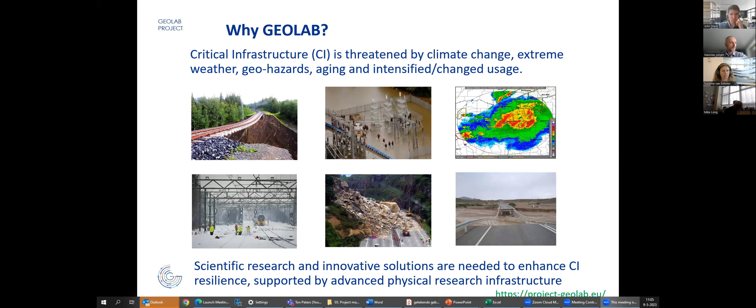And we want to develop our knowledge and develop solutions. So there are a number of examples of knowledge development. So develop knowledge on the impact of climate change, extreme weather, and geohazards, the aging mechanisms of soil and structures, the integral behavior of a critical infrastructure system. These are all knowledge developments, and we are also looking at technology solutions. So like the application of new construction materials, implementation of new building methodologies, new design approaches using data and numerical modeling.

So Geolab is a collaboration of 10 partners who all have a certain type of research infrastructure. And we are talking about geotechnical environmental research facilities. And within our consortium, we have 5 centrifuges. We have the Deltares centrifuge, the University of Gustave Eiffel, TU Delft, Cambridge, and ETH. These are all different types of centrifuges that are complementary to each other.

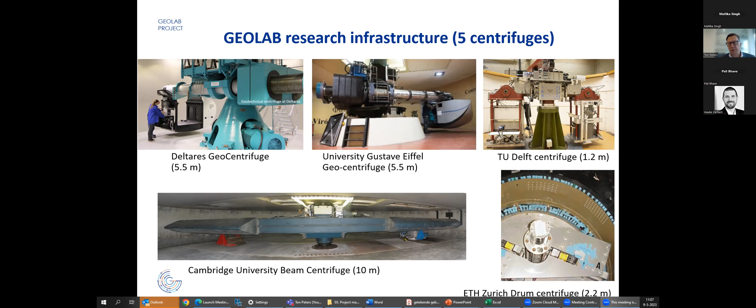But we also have other types of research infrastructure in Geolab. So we have, for example, the geomodel container at Deltares, but also the CEDEX railway track simulator, where you can simulate a whole railway track on 1:1 scale, including also the subsoil and the subgrade of the railway track. We have at TU Darmstadt a geotechnical test pit with large dimensions, 5 meters wide, up to 3 to 6 meters deep, where you can build a model.

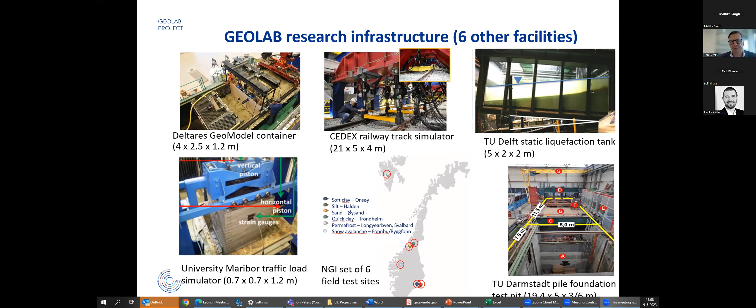At the University of Maribor, we have a small scale traffic load simulator. And in Norway, we have a number of geotechnical test sites. And what you can see is that we are able within Geolab to do tests at a small scale up to field scale.

So what are we doing in the project? We started the project approximately 2 years ago, and these are the activities that we have in the project. First of all, we have the joint research activities where we develop all kinds of deliverables, for example, guidance of transnational access, but also innovation and data management. One of the goals of Geolab is also to share the results of experiments to the wider community, so that the result of an experiment, the data set, is well stored and is also reusable.

The other activity is networking activity. So we're building a virtual community. We have already a big LinkedIn group. We're still working towards reaching out to other new users, and also having a special innovation management part where we try to connect to the industry to build solutions. What's also a nice thing about Geolab is that we have a focus on next generation researchers. So we try to involve them in experimental work in the form of training programs and internships.

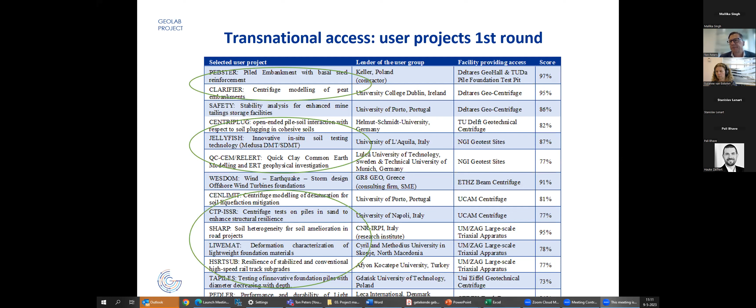These are the results from the second round of transnational access. So these are projects that are ongoing, will be performed this year. We had 26 proposals during the last round of transnational access, of which 11 were awarded access.

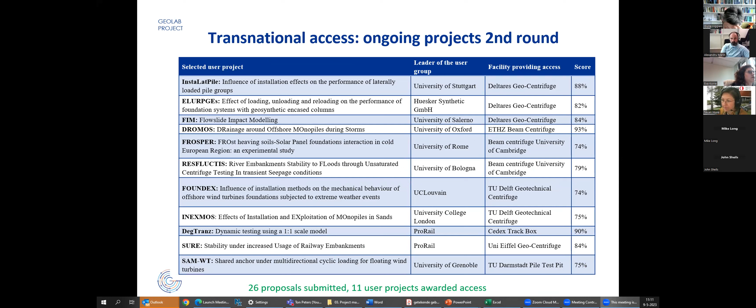So talking about the transnational access call that's now ongoing, the third one, we have selected the theme experiments to validate advances in numerical modeling and data science, leading to a better engineering design. So we are inviting you to bring proposals to the table that fit with this theme of the call. This is funded from the project, as I said, and the submission deadline is on September 30.

So there's still time, but yeah, we say if you have an idea, get in contact with the facility manager, the facility you would like to use, and discuss with them your idea in an early stage in order to see if it's feasible to do the experiment that you are thinking of, and to get guidance on how to develop your proposal. So it's an open invitation to do that.

There are also some restrictions in transnational access. First of all, the user group should be for the majority from the EU 27, plus the associated countries. So international collaboration is possible, but only at a limited scale. And the user group should be from another country than where the facility is. So for the Netherlands, for example, for our facility here, we need to have proposals coming from outside the Netherlands.

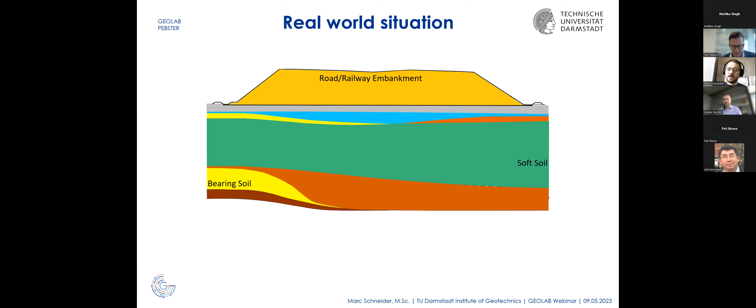First, I want to show you the real-life situation we are modeling. Here you can see a common soil with low bearing, typically softer soils toward the top, and the deeper you go, you will eventually reach bearing soils. If you were to construct an embankment on this type of soil, you would see large and uneven deformations and settlements. To improve the situation, we can make this embankment a piled embankment. The piles are used to transfer the mostly vertical loads to the lower lying bearing soils. Additionally, you can use basal reinforcements to reduce horizontal stresses, which would cause horizontal deformations or horizontal forces on the piles.

To create our model tests, we took a part of this embankment. We altered an already existing test setup at Deltares and performed a series of small scale tests. You see the human for scale, and this figure of the large scale test is also in scale to the other. The focus of our research was the influence of the steel reinforcement, which is the biggest change.

It has a higher bending and tensile stiffness compared to, for example, geogrid geosynthetic reinforcements. Also, these piles are usually assumed to be supported rigidly, and we made a flexible support to see the influence of that. And of course, the whole operation was to see if it can actually be scaled down, and what you have to watch out for.

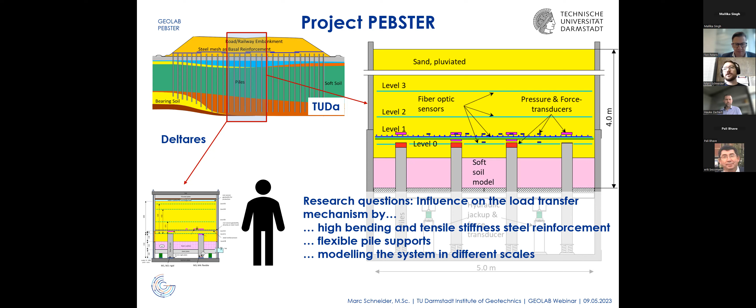At the top left, you already saw in the photos this is the geotechnical test pit here at TU Darmstadt. Of this large pit, we took this small piece that you can see in the photo. The 3 meters depth were enlarged with a formwork placed on these outer walls, to allow a total setup height of 4.0 meters to fit all this in.

In the test setup, just as in the embankment, you have a soft soil below, and the piles are founded more rigidly on a more bearing soil. We have the basal reinforcement in blue, the embankment body itself made up of sand, and of course a lot of measuring instruments.

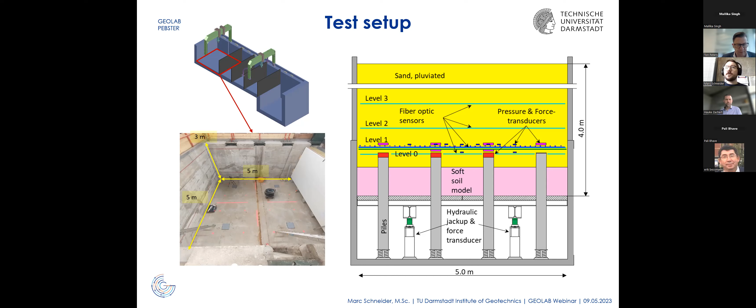I will show a small animation that shows the installation procedure, which is at the same time also the test procedure itself. As in the picture before, you see the soft soil having settlements while the embankment is constructed, the grid deforming, and we also watch the surface deformation while we perform the tests.

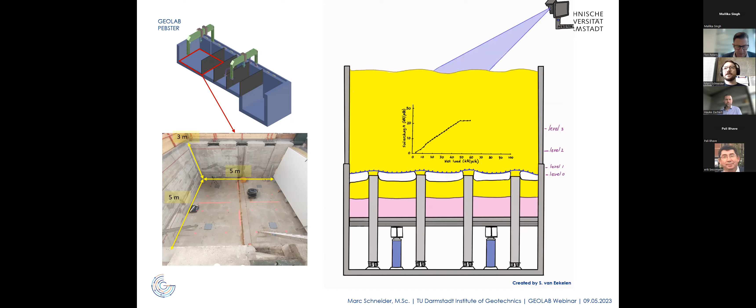Now I want to talk about the elements of our test setup, starting with the piles. Here in the center photo, you can see the base of the test setup, and the piles sticking out by about 1 meter. At the pile top, we have roughened the surface a bit to model in situ concrete. In total, including the space below this second floor, we have 2.5 meters of piles per pile.

This is the flexible base that I talked about - these are springs that allow small settlement for the forces acting. And why do we need this second floor? I will tell you now.

We constructed this setup with hydraulic jacks at the very bottom, then a series of steel beams on top of that. The finish was really thick, 10 centimeter thick wooden plates with holes for the piles that you see in the bottom right. And then a rubber granulate to model soft soil behavior.

This whole setup is part of the soft soil model, because the jacks that you see on the left are initially, before the test was performed, extended by 220 millimeters and can be lowered at the end of the test. So we reduce the subsoil support even more, creating even more settlement in the soil.

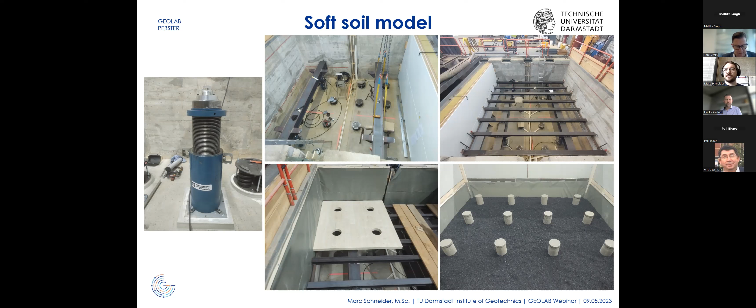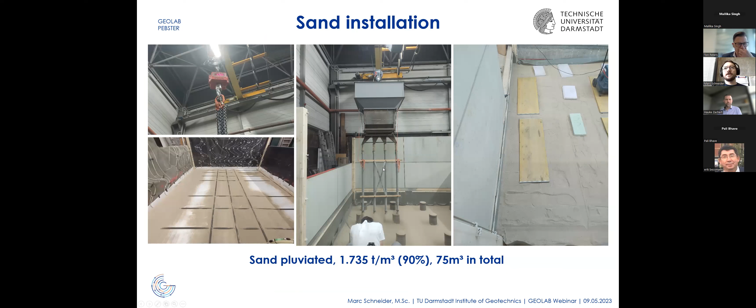The sand, so the embankment body itself, was pluviated with the pluviator that we have here at Darmstadt, which you see in the center image, and we achieved quite a high density. The main difference for this test is the steel reinforcement.

We have 3 parts of the steel reinforcement. In the left half, it's one continuous sheet. On the right, there's a bit of an overlap between those 2 sheets, and these 2 halves are just on contact with each other. They are connected by these hooks you see in the right image, and some of them even have strain measurement.

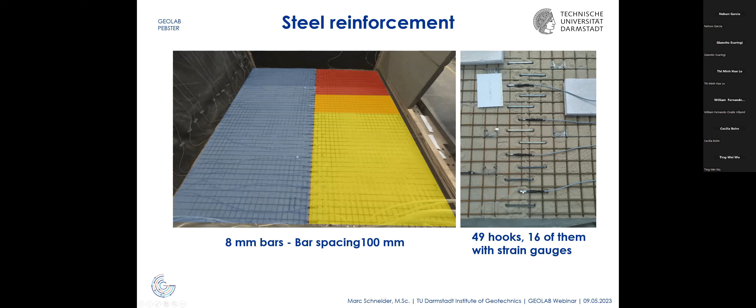More about the measuring instruments we used: these are the glass fiber instruments. In its simplest form, it can contain one single strand of glass fiber that enables us to measure the strain along the whole sensor. In this more advanced form, those black bars contain 4 strain measurements that you can derive deformation from.

Okay, that is my presentation about the PEBSTER test setup. Thank you very much.

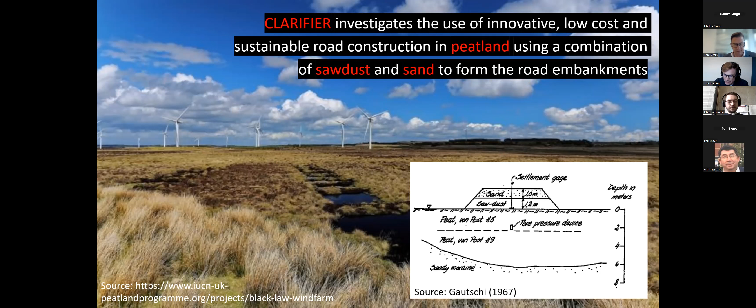Our project was inspired by 4 60-year-old embankments of sand and sawdust constructed on Norwegian peat. Although a range of data from the 60-year-old trial embankment exists, we are lacking detailed data on the failure mechanisms of such sand and sawdust constructions on natural fibrous peat, and we are lacking data on the performance of such embankments during traffic loading. These 2 items form the main research objectives of the Clarifier project.

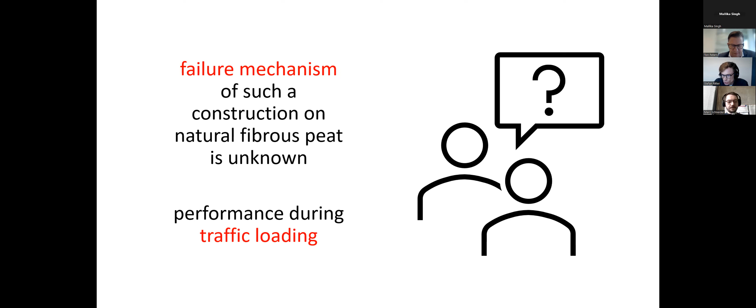To meet these objectives, we performed a series of centrifuge tests. First, we started with so-called three plate loading tests, where we were interested in how well we can model natural peat and how we can investigate the failure mechanism further. These models consisted of natural peat loaded vertically by a load plate, with a range of instruments including displacement sensors, pore pressure transducers, total pressure cells, and a CPT to investigate soil properties during flight.

Then we performed 4 embankment tests, consisting of sawdust and sand embankments at small scale above the peat. In this test, we investigated the behavior of sand and sawdust embankments during traffic loading. Then we were interested in how the peat variability, the natural inherent peat variability, affects the test results. And we performed one test where we looked at the role of a geotextile at the interface between the sawdust and the peat.

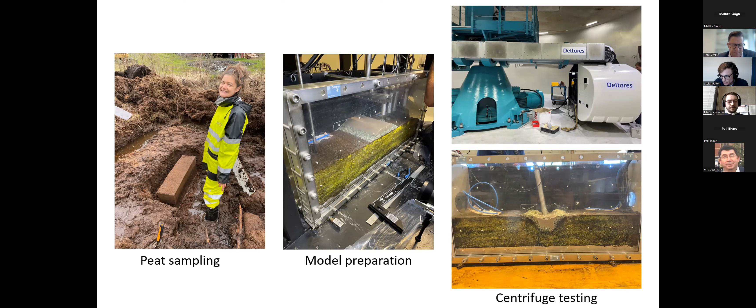We are now working on investigating the experimental data, using data from our sensors, but also conducting a range of digital image correlation. Then we couple our work with numerical modeling, as well as the field data obtained from the 60-year-old field trials, to get further insight into the behavior of these sand sawdust embankments on natural peat.

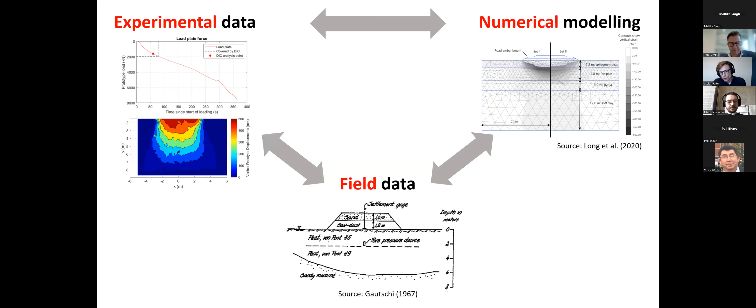If you're interested further in this research, we just published a preprint of our first paper on the behavior of the 60-year-old trial embankments on peat, which you can download already. In addition, Deltares produced a very nice video highlighting the work carried out in this Geolab Verifier project, which can also be found online.

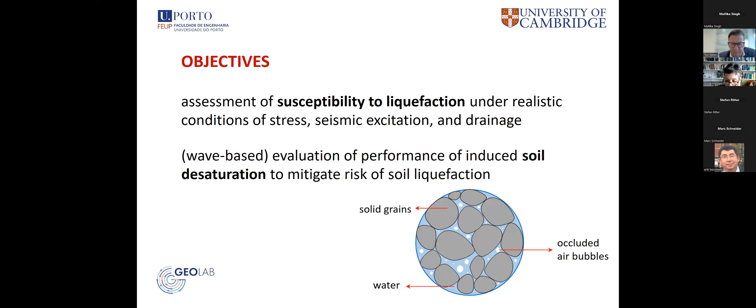Now, the team was essentially a Portuguese team. The leader was Cristiana Ferreira, who is a research associate professor at University of Porto, and she was assisted by two young researchers, one PhD student from Iran working in Portugal and one research associate from Colombia, and Professor Antonio Viana da Fonseca, who was the most senior member of the team. There was also one intern, Arianna Pucci, coming from Italy, joining the activities of the team during the project.

Now, this is a very experienced team on this topic. They have expertise both from the point of view of the interpretation of wave propagation methods, both P and S waves, and also the connections between wave velocity, degree of saturation, and risk of liquefaction.

We tested two models. They were both created in Hostun sand at a relative density of 40%, and one of them was fully saturated using methyl cellulose solution. This is not water - this is to render compatible, from the scaling point of view, the seismic times, the dynamic times, and the times of consolidation.

And the model was heavily instrumented. You can see that there were three layers of bender elements. These were propagating S waves and P waves in the direction orthogonal to the direction of shaking during the seismic events.

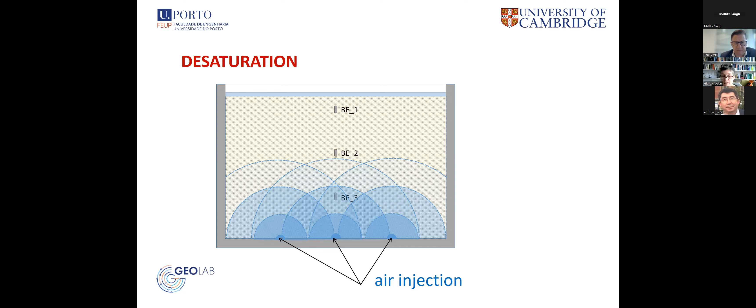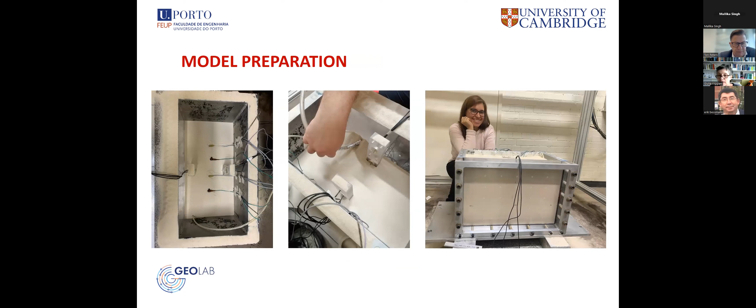And here you can see model preparation. So as the sand is pluviated, the instruments are placed, accelerometers and pore water pressure transducers at the different heights in which they are supposed to be. Here you can see the two columns of the frame that are supporting the bender elements. The top of the frame is only connected after the sand has been completely poured. This is more on instrument preparation, and this is a very happy Cristiana Ferreira once the first model was completely prepared. And here you can see the model once it's been placed on the shaking table.

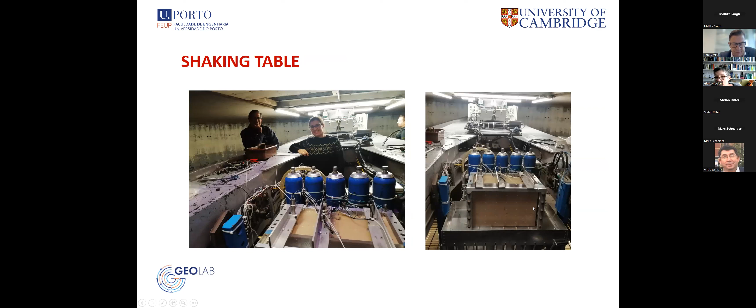So there is this servo hydraulic shaker that can simulate all sorts of dynamic histories. And also you can see here that there are 3 LVDTs that are measuring the surface settlements of the sample directly, besides the PIV, which is done through this Perspex window on the sample. Here is Fausto Molina, still in the centrifuge, but the model is absolutely ready to fly. This is a view from inside the Cambridge centrifuge.

And I just wanted to mention that together with the centrifuge testing, that were the main activities, there were a set of parallel activities which took place in the geotechnical laboratories of the Cambridge National Research Facility for Infrastructure Sensing, which included sand characterization. So the Hostun sand that was used in the test was fully characterized in terms of particle morphology using a QICPIC equipment that will look at the particles as they fall in front of a stroboscopic light, and there are pictures taken. So you can look at a number of morphological parameters, including sphericity, aspect ratio, and the likes.

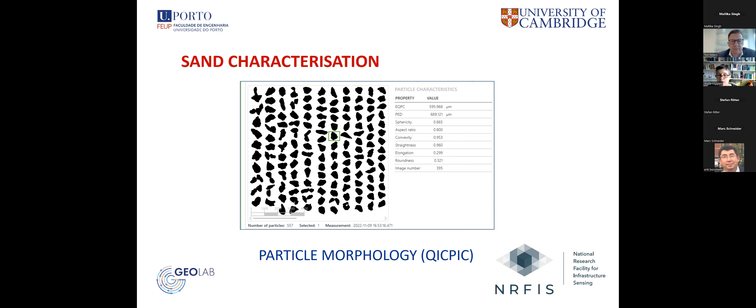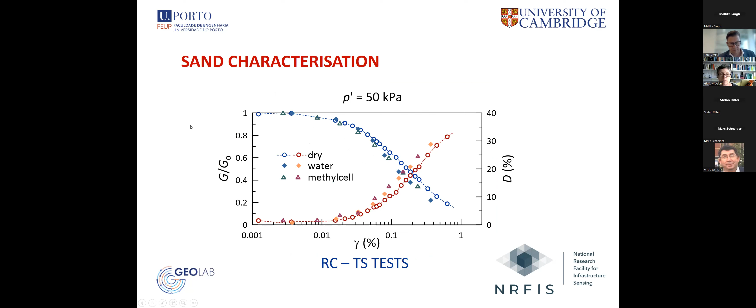And resonant column torsional shear tests were carried out on the sand, both in dry conditions, in water saturated conditions, and saturated using the same methyl cellulose solution that was used for the actual tests, so as to have direct measurements of small strain modulus and damping ratio from representative samples of the soil. Now, the sand characterization was mostly carried out by the intern, Arianna Pucci, and by Rashid, the PhD student, who had a lot of fun using the equipment available in the new civil engineering laboratories at Cambridge.

And just to finish, this was a really fun example of teamwork. I think that everybody got something out of it. Cambridge now has a system of bender elements that can operate in flight, and we're using it over and over again, not just to look at desaturation effects, but also for other effects. And this was, you know, a first attempt at cooperating with this team from Porto, but it is pretty obvious that we're going to cooperate over and over again in the future, to say that these transnational access projects are often the opening way to put in contact different research teams from different countries in Europe, and pave the way to very, very meaningful collaborative work in the future. Thank you.

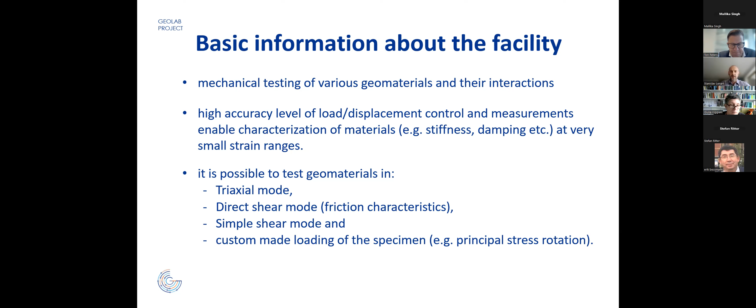What is it? Its advantage is that it's actually a large-scale triaxial apparatus, which can be used in different modes: triaxial, direct shear, simple shear, and also different kinds of custom-made loadings of specimens, also with principal stress rotations. As Ton mentioned earlier, we use it also for small-scale traffic load simulators. The specimen which can be tested is of size up to 80 centimeters in height, 40 by 40 centimeters in square.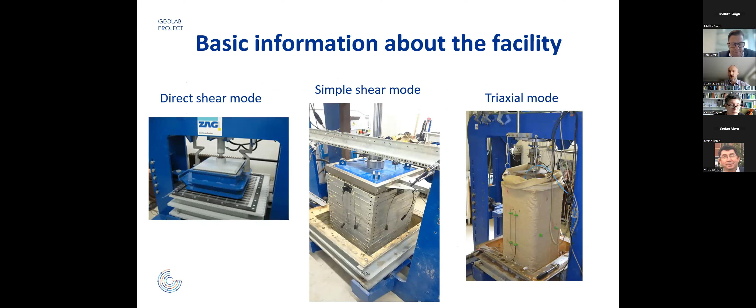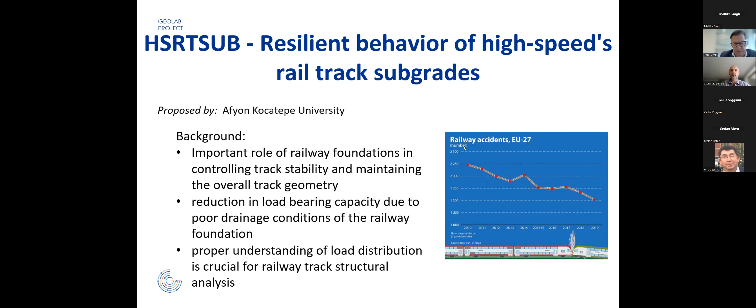Here are 3 photos presenting different modes of testing. In this particular project, which I will present, University Afyon Kocatepe from Turkey proposed testing of railway subgrade to see what are its deformation characteristics. Basically, a very simple test, similar to what we normally do in small scales, but the advantage and why this apparatus was used is that with this size of specimen, we can actually test coarse material like ballast, and that was also tested in this test.

So the objective was to do characterization of ballast track, particularly ballast material. What is the effect when it becomes fouled? So we tested clean and fouled ballast behavior, and the final goal is to optimize the rehabilitation work on old railway tracks. In all ballast railway tracks, ballast becomes dirty with time, and sometimes the railway managers do not really know what is the final level of dirtiness of ballast when it's necessary to clean it, or particularly to replace it.

So the work plan has been to perform simple shear tests on this particular material with cyclic loading. Confining pressure corresponded to K0 condition, and the vertical load which was used corresponded to the 22.5 tonnes per axle load, which is standardized for railways for this kind of track which was analyzed.

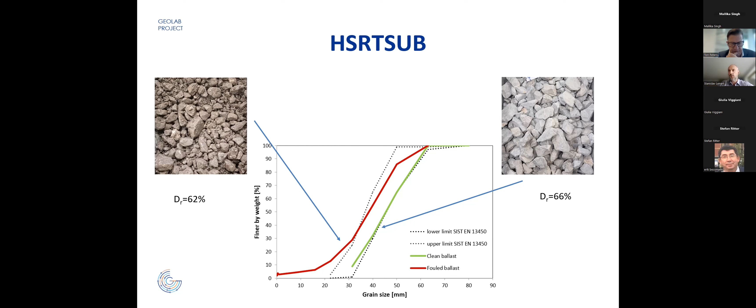So 2 real ballast materials from site were used during the reconstruction of one railway track. We got this material. On the right side you can see clean ballast, and this clean ballast was installed instead of the dirty ballast on the left side, which was excavated from the railway track. For installation of specimens, we used more or less similar relative density for both materials. Also, it's clear that densities for these 2 materials are not the same, particularly if we would use optimum density or something we can achieve with a highly compacted approach.

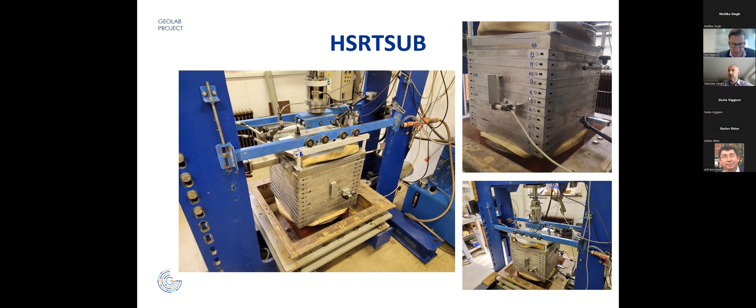So that's the apparatus. As I said, simple shear mode has been used. Displacements are measured on the side and on one front side of the specimen. As all those LVDTs are installed directly on frames, it's possible to measure deformation very accurately. And the loading procedure which we used is described here in this table. You can see we try to start with very small strain cycles to see what is the response. That's how the displacement increased, and we decided to change the loading rate during the cycling.

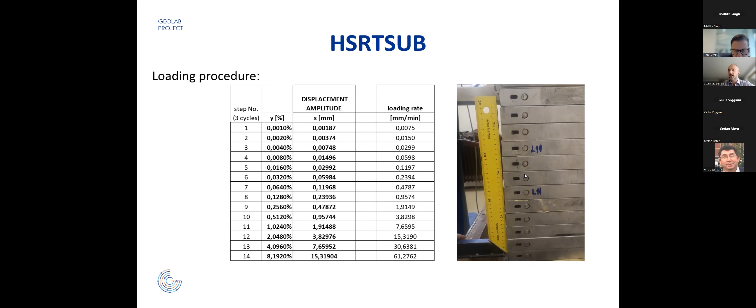So with this project, we characterized deformation properties of two types of ballast. Compared to the previously presented project, it was quite simple and short. In 2 weeks, everything was performed. We observed noticeably lower stiffness of fouled ballast compared to the clean ballast, which was also expected. This experiment finished just recently, so the further step is to evaluate all those deformation properties and use them in numerical analysis. And the final goal is to evaluate what deformation properties can be expected of such a ballast track when ballast is fouled.

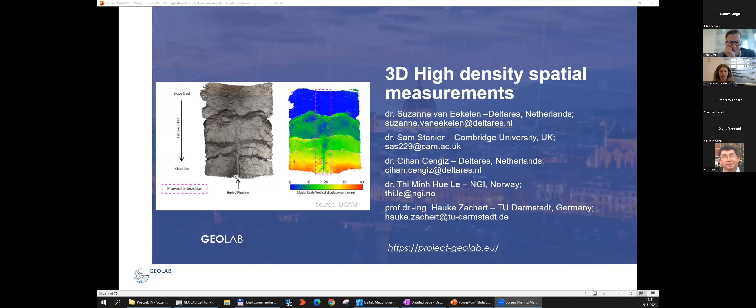And the most important message is I'm going to tell about measurement techniques that are available in some facilities. Sometimes the measurement technique has been available, not necessarily now, and in other cases a measurement technique can have been developed recently. So in each case, if you think about starting a project, submitting a proposal, contact the facility early. If you know which facility, then that facility. But if you don't know, then any facility is fine, because they will guide you towards the facility that fits best, and then discuss the possibilities. In most cases, there are possibilities. So this presentation is to give an idea what might be possible, but please discuss it.

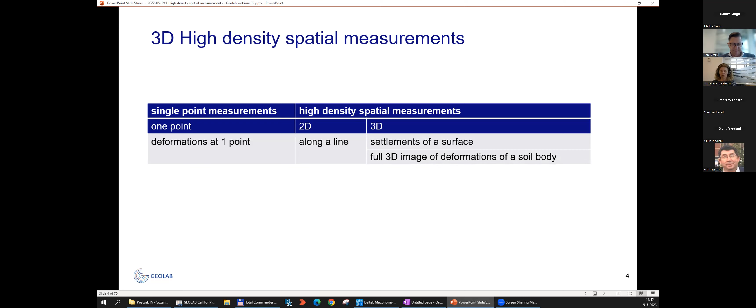What are we talking about? Three-dimensional high-density spatial measurements. So that's not single-point measurements, but a lot of measurement in a certain space. Two-dimensional can be along a line, or three-dimensional can be the settlements of a surface, or even a full three-dimensional image of the deformations, for example, in a soil body. This row is about deformations. We can also want to characterize a soil body on soil type, density of soil, stiffness, saturation, or temperature. In former times, we did this with boreholes, taking samples. And now we have techniques that we can use to look into a soil body, and I will show you some of them.

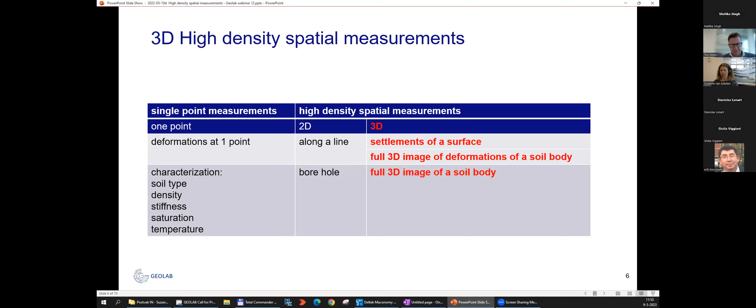So this presentation focuses on the three-dimensional high-density measurements. Of course, we have to limit ourselves for now. We focus on deformations and characterization, and I will start with deformations: three-dimensional PIV and optic fibers. Three-dimensional PIV is a major technique. It's basically using photos and then detecting movements in a series of photos. This technique has been in use for fluid mechanics for over 40 years already, and in the beginning of this century, we started with the geotechnical applications. This part of the presentation about 3D PIV was prepared by Sam Stanier of the University of Cambridge.

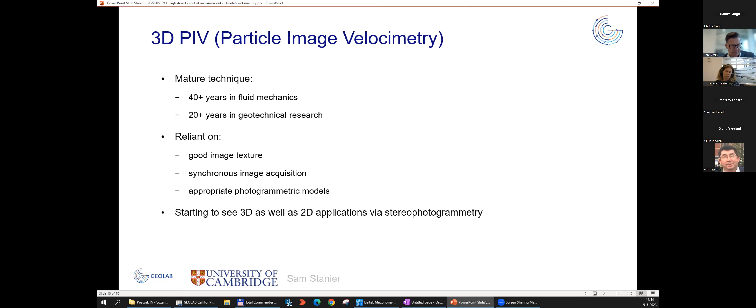For PIV, we rely on a good image texture, so we need good photos, and we need to know exactly when they were taken in comparison to other measurements done in the test. And this is not easy. The University of Cambridge knows a lot about this. And you need appropriate photogrammetric models and software to interpret the results. Recently, 3D applications of PIV have started, and I will show you some examples. One example is this oedometric frost heave apparatus. This is not really 3D, it's pseudo 3D.

This is in Cambridge, and we have a cylindrical sample, 10 centimeters in diameter, 20 centimeters high. It has a double cell with an internal vacuum to provide insulation, because with frost heave the temperature is very important, and to prevent condensation occurring on the glass. Of course, it's frost heave. That means there will be a very low temperature at the bottom of the sample and a higher temperature above. Then we see that the sample increases in height and ice lenses can occur. And when we thaw, the opposite happens.

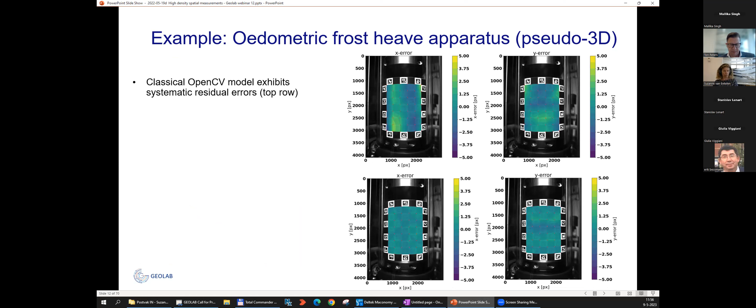They captured the deformations with a single camera. You see the camera in the photo, one shot calibration. And they used the constant radius of the sample to calibrate their photos. And that was not easy. It was circular, so things got deformed, and the classical software, OpenCV, did not perform very well, and therefore they have developed new software to compensate for different types of errors, and that reduced the errors a lot. This research allows new insights into frost heave and freeze-thaw cycles.

Another research was originally done by the University of Western Australia and later developed by Cambridge and ICL. Here we see 16 cameras around the triaxial apparatus. If you look closely at those cameras, you see a green rectangular thing. That's the Raspberry Pi Zero W, combined with high quality cameras. Each camera with that Raspberry thing is relatively cheap, so labs can afford to buy several of these.

This was developed further by Cambridge, and they used a UDP controlled acquisition system, and they are still developing this to be able to have a really synchronized interpretation of the data. This is PIV-driven 3D point cloud analysis. And the result of this PIV work is that we have a very, very precise measurement of the displacement, micron precision.

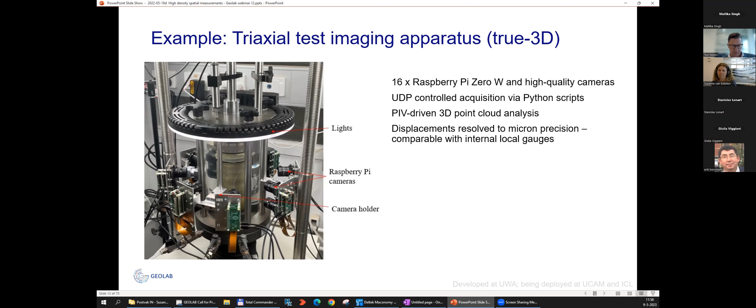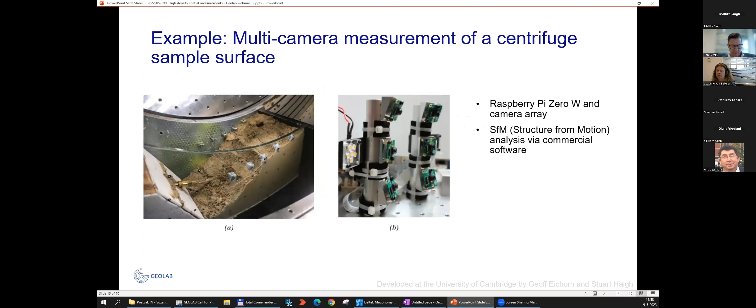Another example is multi-camera measurement of centrifuge sample surface. Again, those green plates, the Raspberry Pi Zero W and a camera array this time. And this is strictly speaking not PIV, but structure from motion analysis. But the idea is the same, and results look like this. So here we see on the right-hand side the vertical displacement measured with this system.

In this case, we have a slope with a pipe underneath. And the 3D surface and topographical measurements were done with these cameras. So this system can be used for other construction modeling, such as tunneling-induced settlement too.

The University of Cambridge is continuing its developments to further acquire images synchronously and then analyze multiple image streams. And finally, they will make available simple and open source packages in Python to do this work.

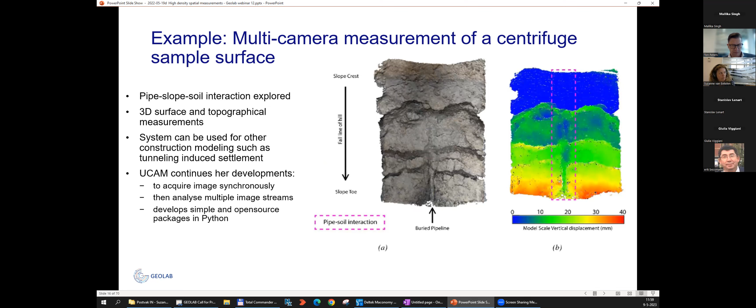So the basic idea of 3D PIV is that we use more than one camera, like the human eyes. Then you can make 3D pictures. In Deltares, this ability was developed too, and in 2012 we developed the possibility to cope with the refraction surface, and that means that we can look through water, and the refractive index of the water is compensated.

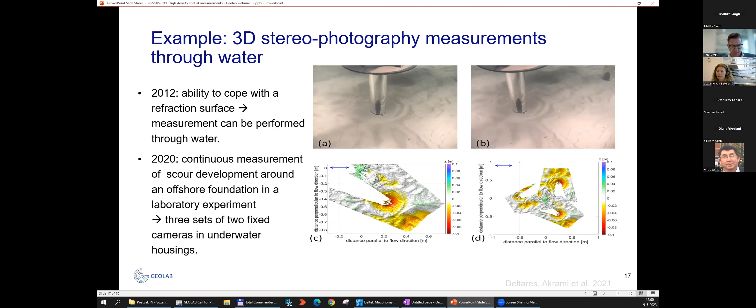And a few years ago, we continued with measuring the scour development around an offshore foundation in a lab experiment. And for this, we needed 3 sets of 2 fixed cameras in underwater housing. And then you see we have a perfect 3-dimensional picture of the deformations in time due to scour. So far, PIV.

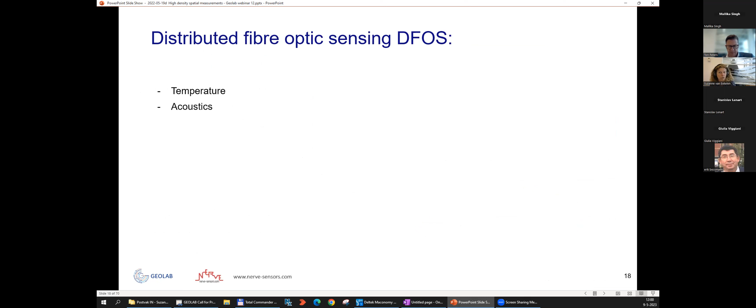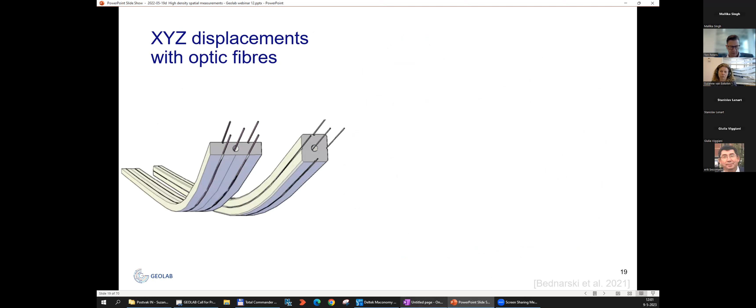Now, from these strains, it is possible to determine XYZ deformations, and I am personally very enthusiastic about this new development. The basic idea is to make a combination of several optic fibers, for example, like this. And when we have this combination, then we can determine the XYZ deformation in a soil body exactly.

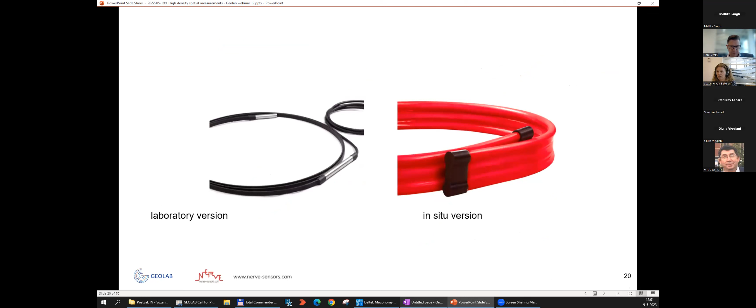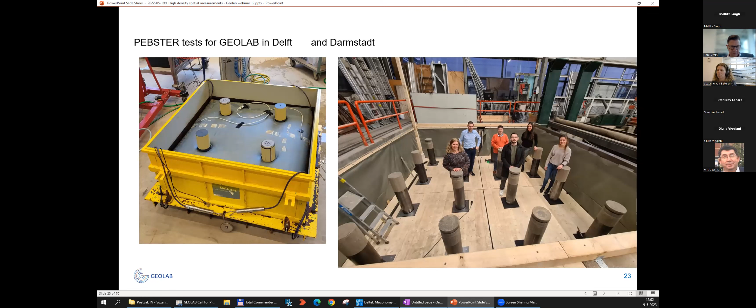Here you see the piles, and then above this we see sand with this system installed. So here we see the XYZ deformation fibers. This is the final test setup.

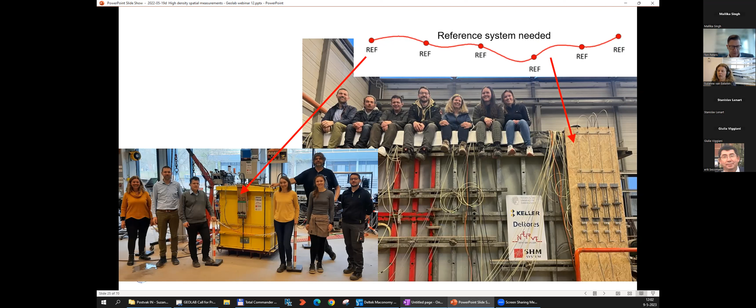And here we see what is important: with this system we can only measure the relative XYZ deformations in comparison to other locations of the fiber, but some reference system is needed to know the exact XYZ deformation. And here we see how we did this. We used cables to measure the exact displacement of certain points of the fibers.

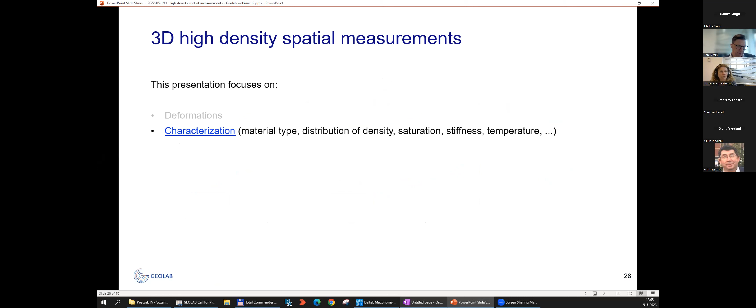So far, deformations. I will continue my presentation with some measurement systems that are used to characterize a soil body. And I will first go into the word tomography, because there are several measurement techniques that use this word. Tomography is a technique for imaging the subsurface that uses any kind of penetrating wave.

There are many examples where the word tomography is used. So like electrical resistivity tomography, ERT, I will show you this, ground penetrating radar, seismic tomography, X-ray, and there are many more.

Sorry. The characterization with waves: we have different types of waves, like mechanical waves, which are seismic or acoustic, electrical currents, so transport of electrons, and electromagnetic waves, and we will go along these three. So first, the mechanical waves, which can be acoustic waves or seismic waves, so moving air or water or moving solid matter.

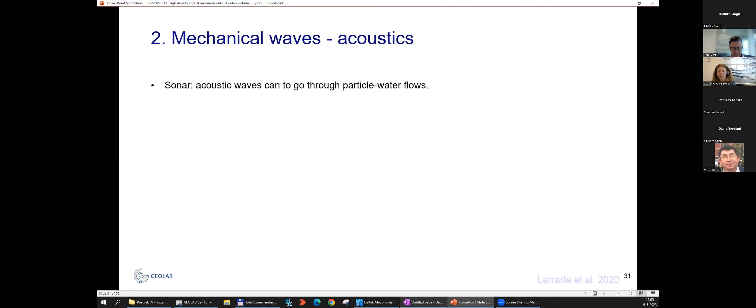This frequency is important to be aware of. When we have a high frequency, we have a small wavelength. Then we can look at things close by, not so far, but it is very precise. And when we have a low frequency, so a long wavelength, we can go much further with any system, but it is less precise. So you can look close by and it's precise, or you can look further away and it's less precise.

With acoustic signals, we can also measure a temperature distribution, which has been used, for example, for storage applications and leak detection. We have done quite some experiments with this in Deltares. Then we continue with mechanical waves, the seismic waves, and the Bender elements. Giulia has shown this already.

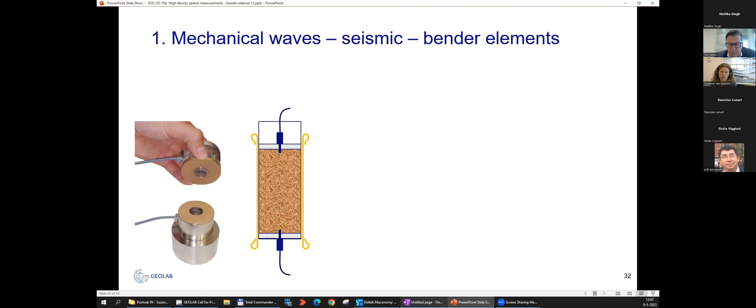Here we see two Bender elements in the hand of this person, and the application of it in a triaxial test apparatus. The Bender element at one side applies a small pulse in the soil with an electric current. So it is a mechanical wave induced by an electric current. And on the other side, the Bender element feels what happens. What we measure is the velocity of the wave and the amplitude of the wave.

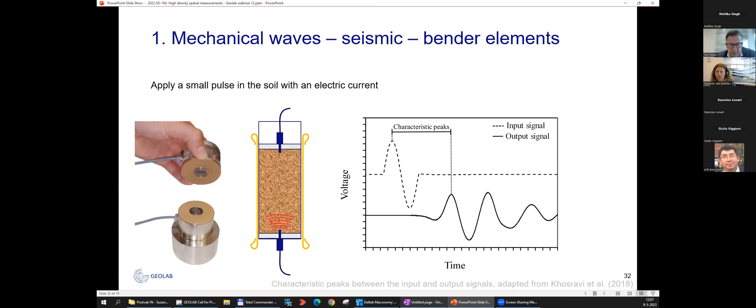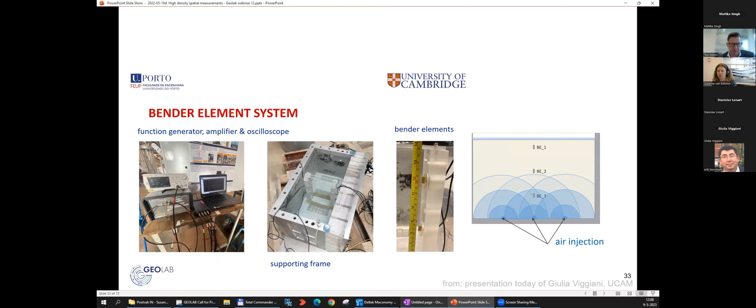Here we see the difference in time between the peak of sending and the peak of receiving, the input and the output signal, and this gives the velocity of the wave. Giulia has just shown you these very nice experiments in the centrifuge, which can give a picture of the small strain stiffness in the soil body. At Deltares, we are currently also developing a similar test setup for centrifuge tests.

So far mechanical waves; then electric current and electromagnetic waves I will tell you about. Starting with electrical currents, that's the electrical resistivity tomography, a well-known technique, applied a lot in the field and also in the lab. We have quite some experience in the lab using this technique, and it works like this.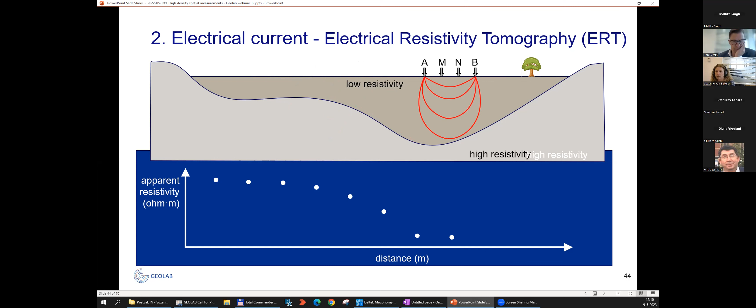In this picture, we see an area with a low resistivity, the upper layer, and a high resistivity. If we move this test setup like this, and then like this, we see in the graph below that we have more or less the same apparent resistivity all the time, which is clear because we have the same layered system. Then we move it again, and now we see that the resistivity decreases. Now it is at its lowest because it does not see the high resistivity layer anymore. And there it comes back. From this, we can determine that this is a good location to take a soil sample.

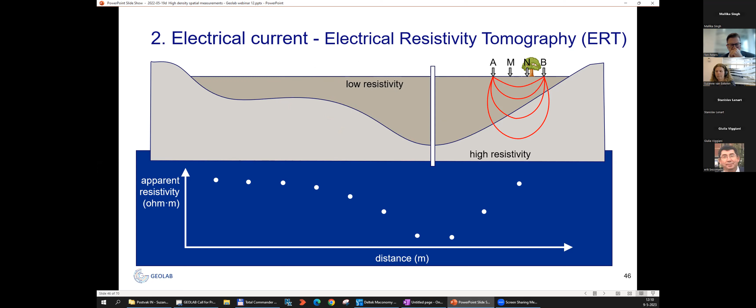The system of ERT gives you blocks of volume, units of soil that have a certain resistivity. So you don't immediately look into the soil or have your results immediately, but it is very robust. It goes deep if you put the electrodes far enough from each other. It is very useful, and currently several new techniques and test setups using this are under development.

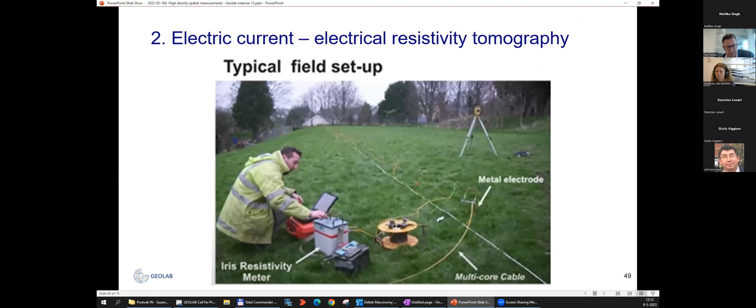Now, electromagnetic waves. Here we see the scales of wavelength, which is related to the frequency of electromagnetic waves, and this is the visible area of these wavelengths. Here we have the other types of waves: gamma waves, X-rays, ultraviolet, infrared, microwave, and different types of radio waves. Radio waves have very long wavelength, so they travel very far. Gamma rays, on the other side, have very small wavelength, high frequency, so they do not go far, but they can give very precise results.

Now, LiDAR or scan systems use these frequencies. Infrared is part of that. INSAR or other satellites use a frequency around this range. And ground penetrating radar uses frequencies like this. I will show you one slide about LiDAR and INSAR, and then I will shortly go into infrared and ground penetrating radar.

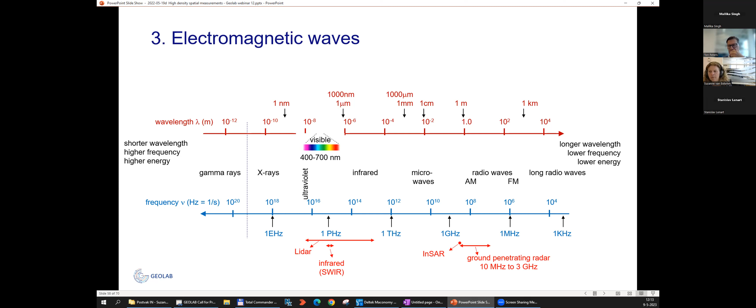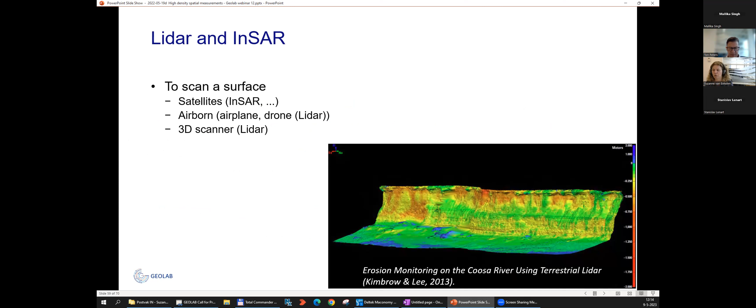And then infrared. This part was contributed by Barcelona University. The idea is that wet soil has a different appearance, and the purpose of these measurements is to determine the saturation of the soil: fully saturated, fully dry, or somewhere in between. Here in the right-hand picture, we see a Deltares centrifuge test, and we see where the groundwater level is. You see that this sand, which basically has the same color as this sand, is much darker. And here you see also much darker sand than here, which is the same layer. So wet soil has a darker color than dry soil.

Why? Well, this is the result of the interaction between light and matter. There's water around the grains, and this changes the scattering and absorption of incident light. The more water, the more light absorption, both in the visual range, but specifically a lot in the infrared range, and then specifically between those wavelengths.

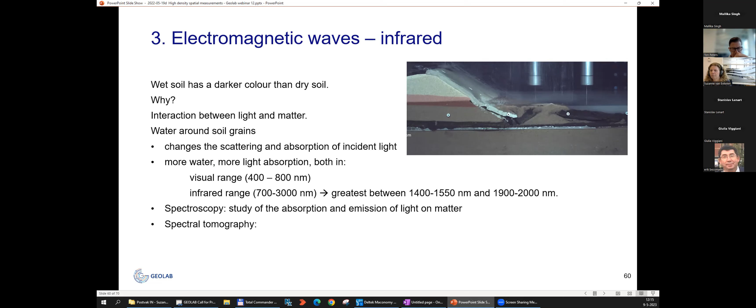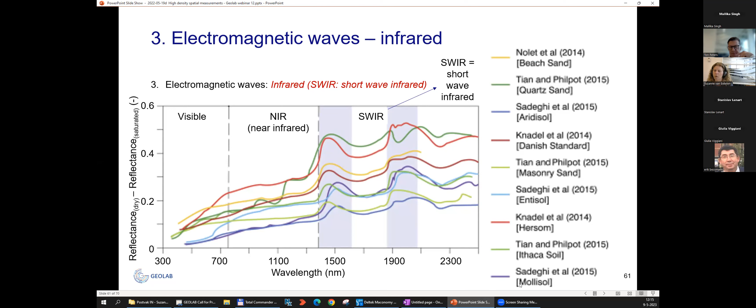Here we see the difference between dry and wet soil. That's only the difference, and you see it's higher in this range and higher in this range. This is the wavelength. Now they did very nice experiments: they took dry desert sand and made pictures using infrared light, then made it wetter and wetter until it was fully saturated.

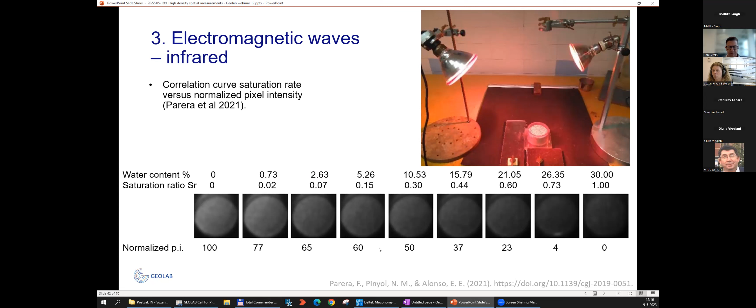You see this is a light picture, this is a dark picture, and we can measure this with a computer - that's a pixel intensity, PI, and here we have the normalized pixel intensity. From this, Parera constructed a curve giving the normalized pixel intensity on one axis and the degree of saturation on another axis. This technique is still under development - for example, how usable it is through plexiglass is still to be determined, but it is a promising technique.

We are getting to the end of the session, Suzanne. Yeah, this is the last subject.

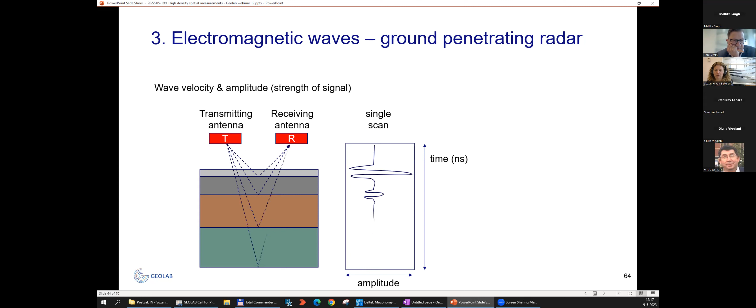Okay, the ground penetrating radar. The idea is we have a transmitting antenna and a receiving antenna, and the waves go through the soil and reflect at the boundaries of the different layers. This is a nice animation - we see there is a difference in the layer, but there's also a pipe, and the pipe is visible because of its conical shape. The result is what we see here: a parabolic shaped thing, which indicates there is a pipe.

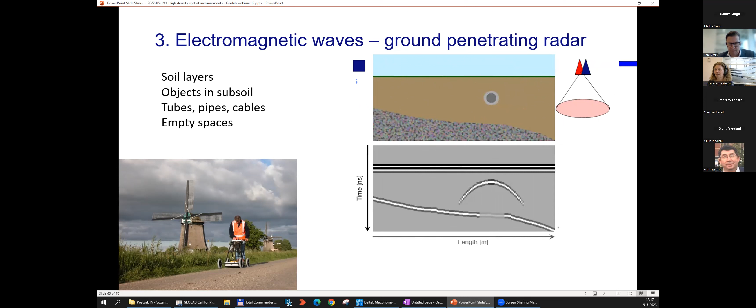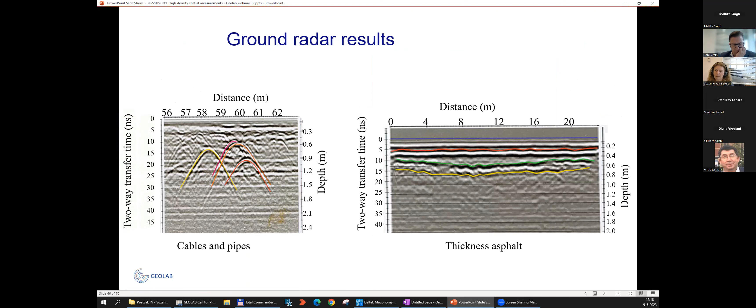I will show once more. So these radar techniques - here we see cables and pipes, those typical parabolic shapes in the results. And this is another example for the thickness of asphalt. This technique is quick, very quick - you have immediate results, you can see in the field where your pipe is. Oh, sorry for the Dutch.

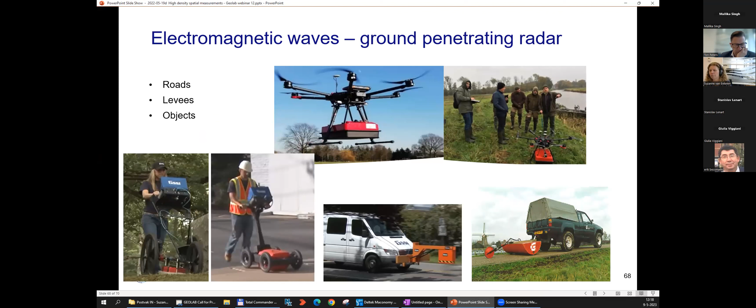It's used in roads, levees, and to determine where objects are buried, like pipes, tubes, or anchors. I used it recently - it's done on railways also, and we can use this in labs too, using higher frequencies because of the small scale of lab tests.

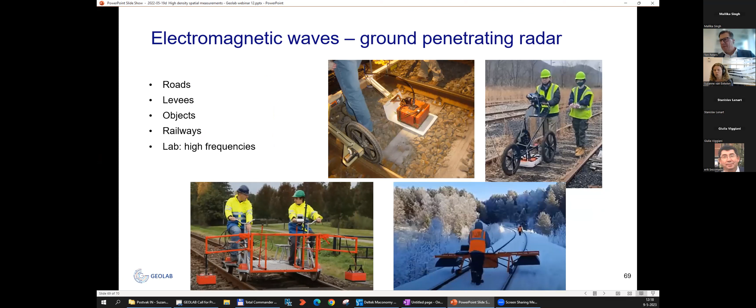Now this brings us to the end of this presentation, and I would like to repeat the first message. Please contact the facility. If you are thinking about starting a project or preparing a proposal, discuss the possibilities for measurement techniques. I thank you for the attention.

Okay, thank you, Suzanne. Very nice overview. I hope it is an inspiration to the participants to come up with nice ideas, nice proposals. Let's get to the questions. We have a few questions in the chat. Can you, Malika, can you address them? Yes, of course. Thank you so much.

The first question we have for Mark from Daniel. You use a metallic reinforcement. Will you want to use a geosynthetic one? Is it possible to modify the pile arrangement?

Yeah, so I will answer these questions. For the first part, the steel reinforcement: within the scope of PEPSTAR itself, it is not planned to use geosynthetic, it's planned to only use the steel reinforcement. But in general, we are of course interested in the behavior of geosynthetic reinforcements in the same test setup, because when we assess the performance of the system, we would also need a reference so that we can compare it, so that we can actually say it behaves differently in these aspects. So this is a goal of ours, yes.